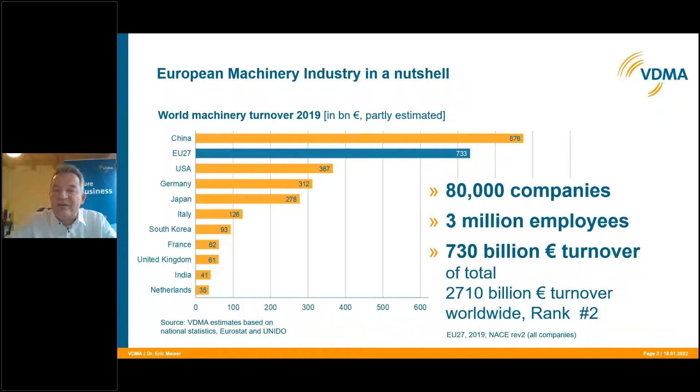Germany plays a significant role here, as you probably know. So that's what VDMA is all about, really being representative and representing this industry. And as you know, Industry 4.0 has been a major and big topic for all of us for 10 years.

Starting with cyber physical systems and the Internet of Things, going to self-organizing production. And of course, mechanical engineering is not mechanical anymore alone. So there is a lot of electronics and digitalization in there. The last wave being artificial intelligence, machine learning.

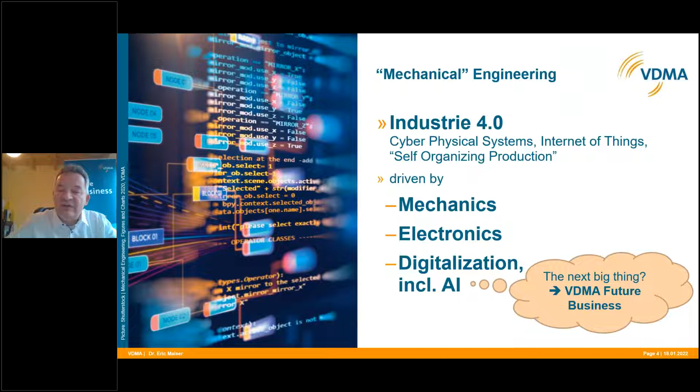And the question for VDMA Future Business as a competence center was really to ask the question, what is the next big thing? So the next 10 to 15 years for the industry and what's happening there. VDMA Future Business started as a competence center within VDMA, really to be a good service partner for our members.

But we soon recognized that, of course, all or most of the small and medium enterprises in the mechanical engineering industry have basically the same problem we have, because there is a lot of trends out there. It's like a big ocean of opportunities, but a lot of buzzwording and a lot of things you probably don't see at first sight. The point was really to put up some lighthouses here in this big ocean of opportunities.

Of trends, and try to think ahead for the whole industry, dig out, dive for the new trends, do trend scouting, not only for VDMA to look ahead, but also for the whole industry. And that's why we say we are a think tank for the mechanical engineering industry. And the trend scouting is kind of a helicopter view of what we do there.

We have a trend radar consisting of 160 trends relevant for the mechanical engineering industry. And when we find out that there are bigger trends, mega trends out there, important for all sectors of the industry, then we dive deeper into a scenario analysis, and I will show you in a slide what this is all about.

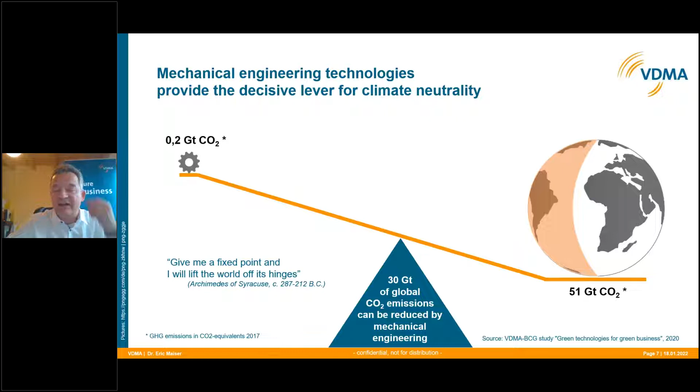But to have the right ideas, the right technologies and the right people, startups are very important here. We have seen that startups are very important for the mechanical engineering industry in a couple of ways. They put trend topics very fast into action, into new products, and they have a very different way of working, which is also very interesting for the mechanical engineering industry.

On the other hand, mechanical engineering is a huge user industry for startups. So we basically have two parts: a rather conservative industry on one hand, and on the other hand startups that are really applying new technologies and new ways of working. Bringing those two parts together is what we wanted to achieve at VDMA Startup Machine. The big point for the mechanical engineering industry in terms of startups is finding a suitable partner.

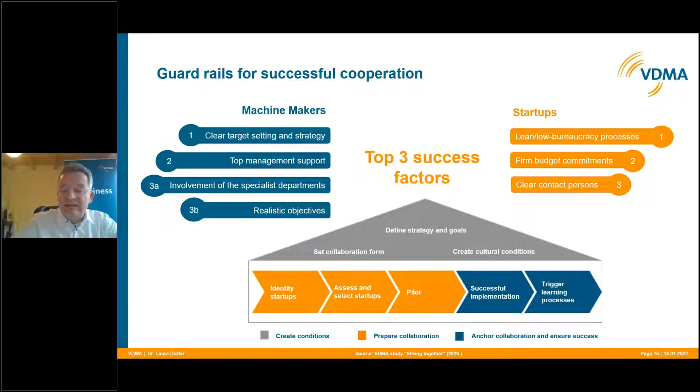So the big question is, how do we get to this point? Which startups are interesting for your company? This is what we do with the startup scouting. One of our big services here is what we call Startup Radar.

So there are landscape reports where we really go into the matter, navigators through this global startup scene. Of course, mechanical engineering is a global industry with big exports, so it's very important that we look for partners and projects around the world, not only the startups in the big hotspots like Silicon Valley. Bangalore, we found out, is also a very big spot, and India as a whole for our industry.

And with a Startup Radar, there is also the possibility to do deep dives. If you're interested in a certain technology like artificial intelligence, then you can check out in the Startup Radar where to find startups for artificial intelligence, for example. We have done that. And then there is what we call the Startup Radar dashboard. So we work together with a Berlin startup that scouts and searches for startups worldwide, with a database of 1.5 million startups around the world. Our point was to really figure out what are those startups relevant for the mechanical engineering industry. I will show you a little bit of detail here.

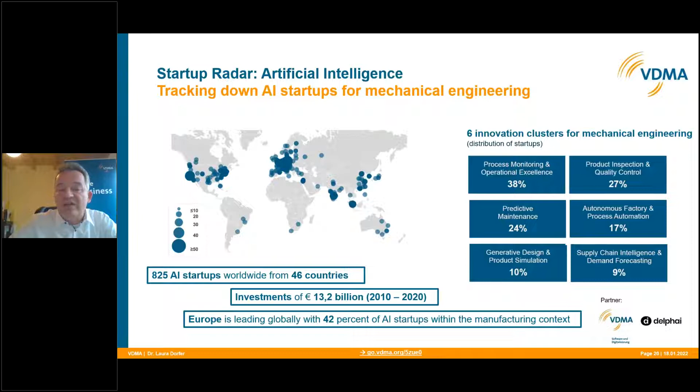But the interesting point was that there are a lot of startups in Europe, working for the mechanical engineering industry or with a manufacturing context, and that was interesting for us - that the hotspots are not always the US, so also interesting for you. And if you go into India, you can check that with this tool too.

AI is a major trend with 104 Indian startups. We found more than 350 startups altogether in India, and this tool, Startup Radar Dashboard, is really AI based itself. Out of 1.5 million worldwide, they find those startups in a search process with crawlers. AI really does the job here, because otherwise it would not be possible to reach such high numbers.

Emerging technologies in India are ambient intelligence and robotics. Other related trends are autonomous vehicles and automation. So it's a very good possibility to see startups working with AI in India, but of course you can search for a number of other topics. It's very interesting to dive into the matter with that tool, so I can only give you a glimpse of what is possible here.

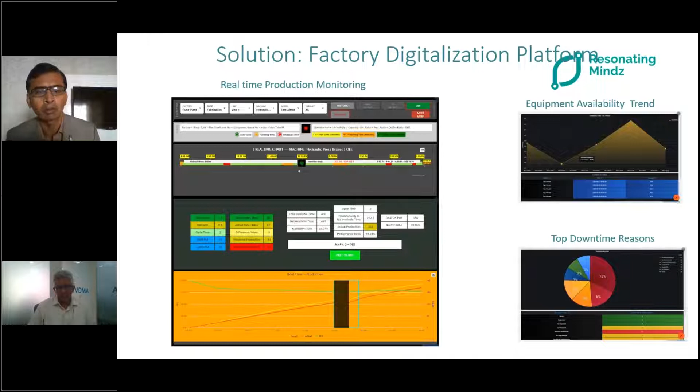Here are the quick benefits: paperless manufacturing, improvement in OEE, empowered management in terms of the right analytics, empowered frontline line workers, and utility consumption savings. These are the quick benefits.

Let's talk about the second offering, which is predictive maintenance of industrial motors. Industrial motors drive critical equipment; if they fail, there is significant production downtime.

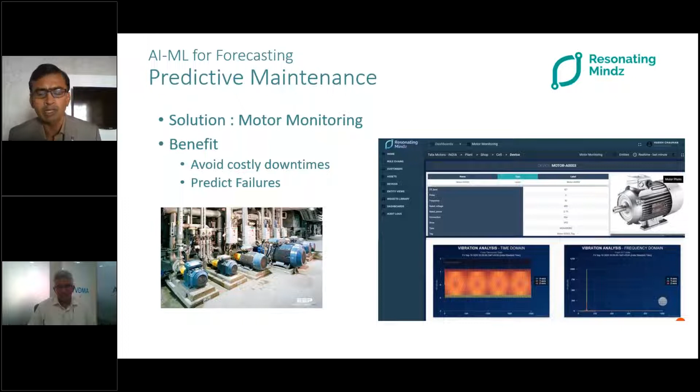We analyzed the engineering principles of motors and built a device we call the X-Predictor. It is wireless and battery operated. It sits under the motor and continuously captures vibration data. On the server side, we analyze this data using AI/ML algorithms that continuously run and predict failure before it happens. This helps maintenance heads and managers take the required action and change the motor at the right time.

Let's look at the next offering, which is utility consumption monitoring. Plant heads would like to focus on the bottom line as well, and gas consumption, energy consumption, these are important aspects to control.

All that we do is connect with the field bus automation systems, and connect all the data from the energy meters and gas flow meters, continuously reading the data. What we present is the right analytics in terms of hourly, daily, weekly consumption, alerts, and predictions in terms of anomaly detection.

You have one more minute to wrap it up, please.

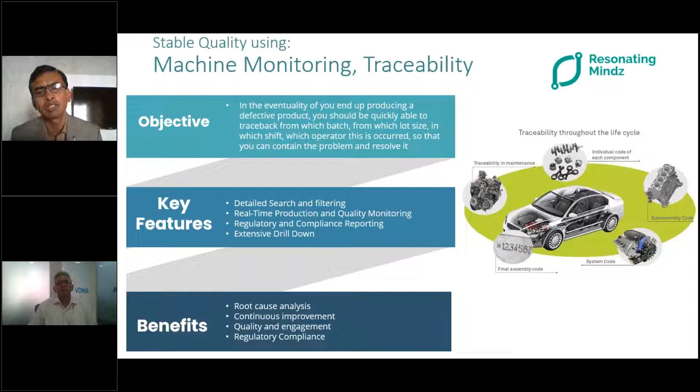On part traceability, it is specifically for the automotive industry. It helps trace, when a part is produced from multiple machines, what the machine parameters were for each, so that for compliance, recall purposes, and identifying which lot the part is from. These are all important things, and this is how the traceability solution helps.

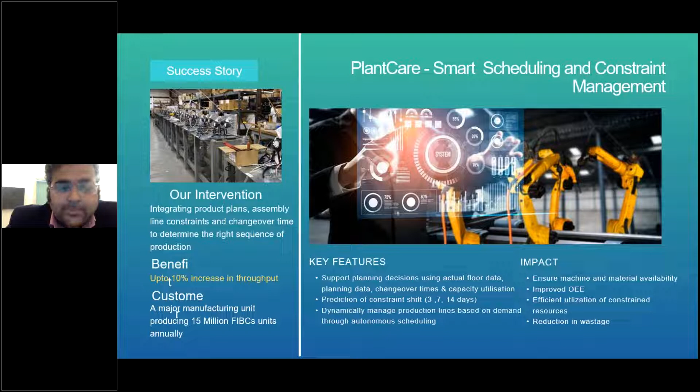Then we extend this software to the OT data. We've deployed landmark case studies across 10-20 refineries where these large heat exchanger trains exist, and we are able to predict the delta T across a heat exchanger train. We can predict when a heat exchanger will foul, when to remove it, and optimize the entire changeover such that the heat duty being reduced is optimized with the refurbished heat duty you get by placing another exchanger there. We've done this entire smart management for Indian Oil right across 9-10 refineries now, and we also work on rotary assets, all the critical assets of a refinery.

These critical assets are essentially turbocharged compressors, for example the main air blower of a very big unit. It's a critical machine, and if it fails, as the previous speaker said, it causes a lot of production loss. So we've been able to save around $600,000 per shutdown, and since the last 1.5 years they haven't had any shutdown, whereas they had around 5 in the previous two years.

They've given us a written testimony that this has happened for them. We're able to give not only predictive prognostic health management around it, but also predictive asset performance optimization, for both static and rotary equipment of any kind. We have modules for both.

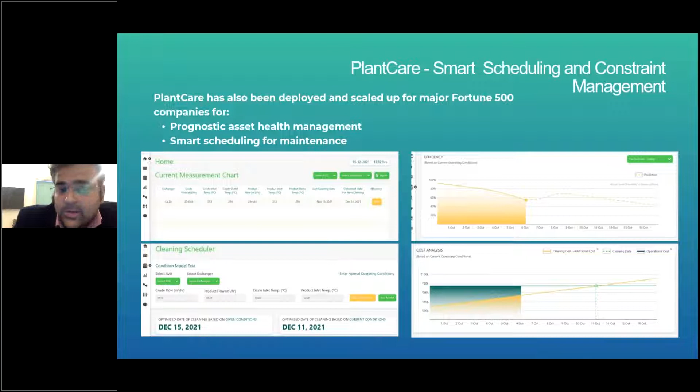Then we come to the visual side of things. Many times we have defects in the products, so there's a lot of pre-dispatch inspection that we do. Also there is defect at the source — for example, this one is a clear case of weaving. We're able to detect it and integrate with the PLCs to basically stop the blade before, so that the wastage of the cut piece is reduced drastically. It's almost a 3% decrease in wastage, which is roughly $1 million a year for this particular plant. We're able to give them very strong KPIs around quality.

This is the deep learning engine. It continuously learns anomalies and categorizes them as defects based on a defects dictionary, which is continuously getting updated. This has been done for textiles, the zinc industry, the aluminium industry, iron and cast iron, and a lot of mechanical equipment for automobile manufacturers. A lot of work is being done there.

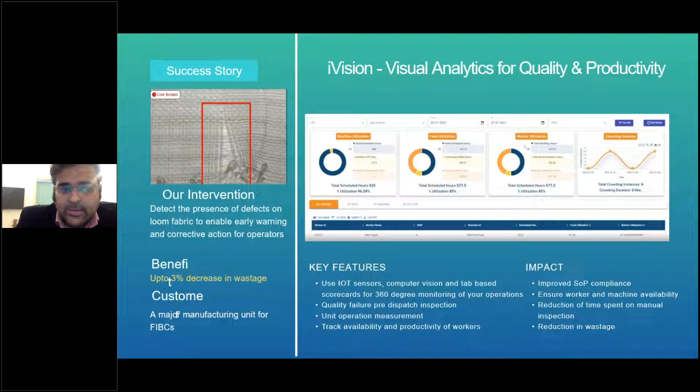This is another interesting case where we are now using deep learning on very simple CCTVs in the plant. For example, if there is a huge shop floor with discrete lines designed as per TOC, and we're doing line balancing, we want to know the material availability, the throughput, and the count of bags — how much inventory throughput the person is able to create on his floor.

We're able to discretely count it, and tell how much time the worker was available there, how much time the material was available there, and how many crowding instances were happening on the floor post-COVID. We're able to do all of this in real time, and generate very nice alerts and MIS for the management.

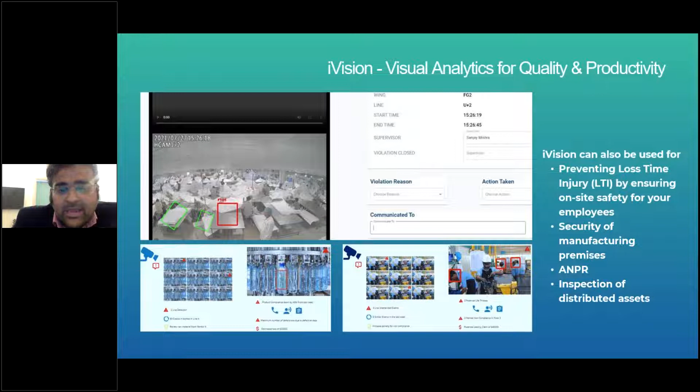All our capability is very deeply integrated with SAP BTP. We are using it to deploy for two of our very large clients, and it also gives us some leeway on the security aspects of things. Otherwise, we have a completely open source stack that we've built.

Apart from that, we have a very interesting offering around sales intelligence and robotic process automation. Many of you might have suppliers and dealer networks — we're able to analyze them, crawl data from the web, and build hotspots of more dealers you can target to enrich your supply chain.

Also, given a relationship and sufficient data, we'll be able to tell you the walkaway price or the premium you need to charge for a particular deal. We do that using throughput and constraints of your capacity, the history of customer fulfillment for that relationship, and also the competition. We even use data from the ports, how customs are shipping, etc. That data is also available, so this is another interesting big data use case we've done.

Apart from that, it also analyzes how emails are coming and how we're responding, what the relationship level is, and how the sentiment is. Based on this, we've brought about a key differentiator for the client, because he's able to distinguish which order to take and which not.

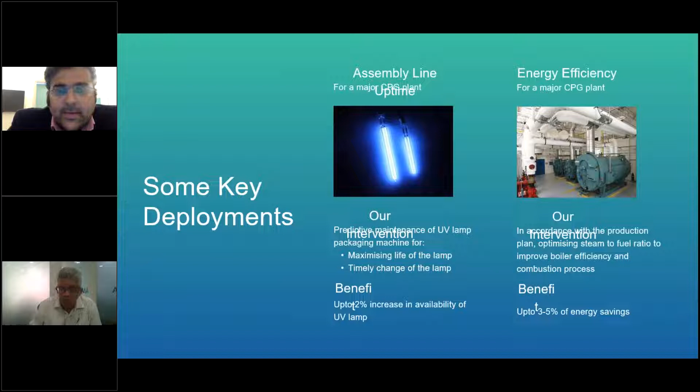Next slide. As I told you, the defect detection algorithm can be extended to packaging and to other kinds of assembly lines as well.

Apart from that, we are also doing customized sales territory mapping, for example for Anheuser-Busch, where we analyzed how their distribution and pricing is working. Next slide.

More projects across these sectors where we are working on digital twins, etc., working on very hard problems where intertwined engineering data is there, and we are learning from that data with first principles and ML. Next slide.

That's it. We are very keen to solve engineering problems, especially with the application and fusion of artificial intelligence and first principles. We love engineering. I am a trained chemical engineer, my co-founder is a mechanical engineer, and we are data scientists, so we love to solve engineering problems.

Thank you, Nandan. A very interesting presentation. We now know that data is the most important thing in mechanical engineering, apart from the machines. Thank you for enlightening us on that, and you were within schedule. Thank you for that.

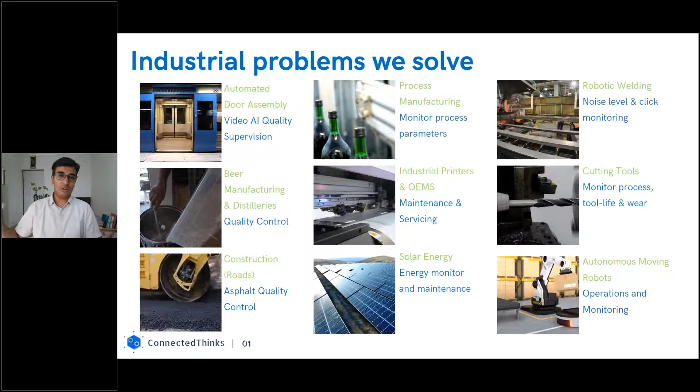We work with a robotic welding process company, where we use noise levels to detect what is happening with the welding process, or if something has gone wrong there. We have OEM solutions, where we work with OEMs such as large industrial printer manufacturers, or autonomous moving robots, just to name a few, where all the process data, all the operations data gets fed to the platform, gets transformed and made available to the management as well as the operations floor to take actions based on that.

Moving on, specifically focusing on the manufacturing part, we deliver multiple applications, connecting to various machinery through PLC SCADA, through gateways, through industry protocols available on the manufacturing floor. All of this data gets fed to our platform, and we deliver specific analytics applications on top of it.

Just to name a few, the use cases are in monitoring, where we have downtime monitoring, OEE, which is one of the important factors for industrial efficiency, or even safety and health related monitoring use cases. Predictive maintenance predicts multiple things as well.

Predict the system health, predict the tool health, predict remaining useful life of a tool, do log and search over data. So you have millions of lines of logging and text fed to the platform, and you need to search across that, search your manuals, and all of that needs to be automated. All of that is possible through the platform.

And of course, video and ML based use cases and applications, where we have developed a few AI supervision applications, which I will touch upon in a couple of minutes.

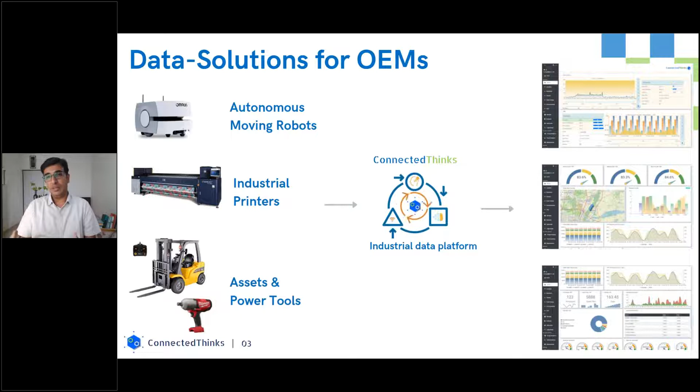Moving on, this is another use case that we have built. This is around AI supervision, where we have an assembly floor with a lot of manual tasks being done around assembling a specific part.

One of the key challenges many of you might be aware of is that once the part is done, let's say a door assembly is complete, there is no way to inspect what has gone inside or what quality you have gotten. So once this is delivered to your customer and it has been used for 6 months, if there are defects, you get a return, and that's a major challenge for many OEMs in this industry.

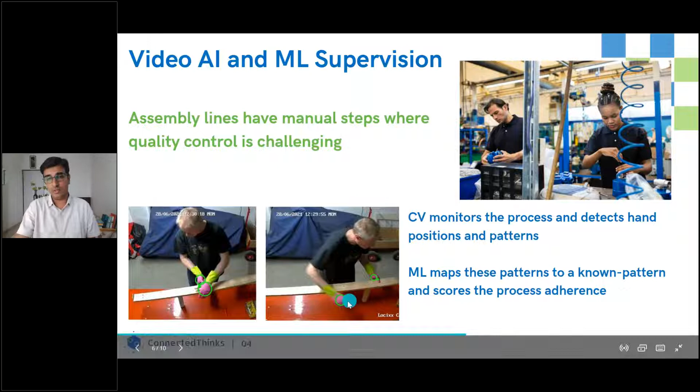Now, the benefit of that is you will know then and there if something has been missed, and you can go back, review it, correct it, and save a lot of money, especially when the tools are expensive, the tasks are expensive, and they are used for a very long period, such as in metro rails and other equipment that is manufactured.

You will realize that this needs to scale. It can't be built with just one particular vertical or one particular application in mind. It has to scale for each application. You need to be able to move on and build multiple applications as your business grows, as new use cases come, and as new business logic comes in that you need to deliver.

So at the core, we are built to scale. The platform is built with various technologies like Kafka, Presto, Docker, just to name a few, and we are built to scale to very large data sizes. At the core, our founders come from a telecom background. We understand security, data privacy, regulation, and these are very important for us, and we deliver specifically to enterprise customers in this industrial area.